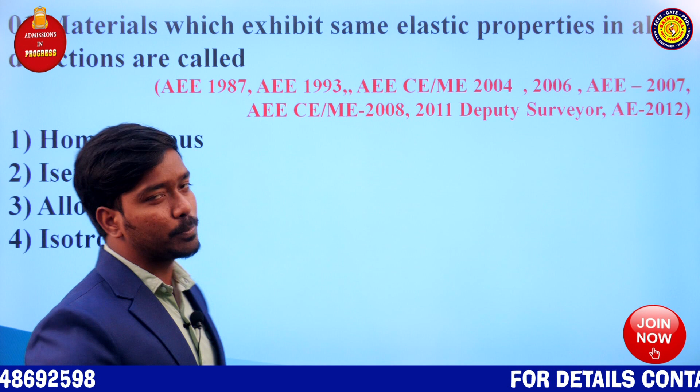The first slide that we can see: question appeared, material which exhibits same elastic properties in all directions. What I want to convey is, observe this, from the starting 1987, then 1993, then it appeared in the year 2004, then 2006, then 2007, then 2008, 2011, 2012. So these many times a single question has been appeared.

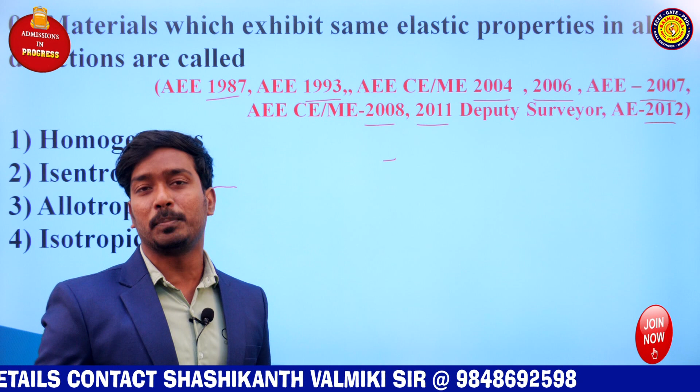In the Assistant Engineer examination, every single question, every single mark is going to get you nearer to your dream job, that is Assistant Engineer Civil job. So definitely, however silly a question may be, if it is repetitive, you should be learning about that question. So we'll be discussing about all those important points now itself.

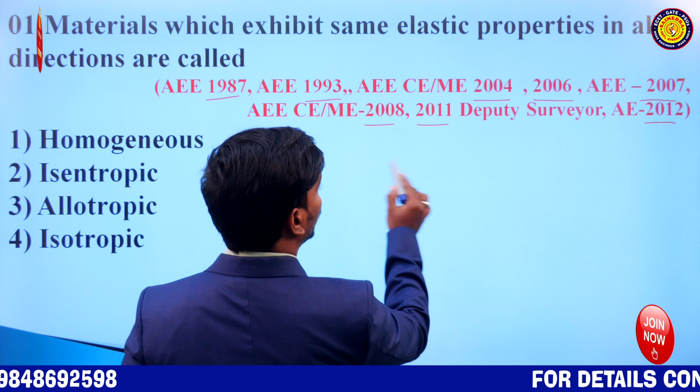So the first thing that we are going to talk about is, what is the meaning of a homogeneous material? Observe here. At any point, property in one direction is going to become same. Same in one direction only.

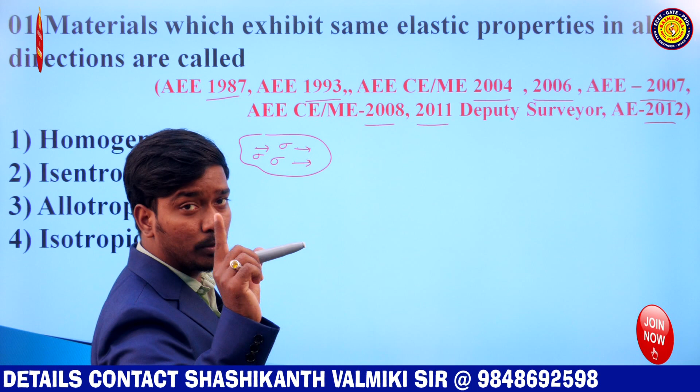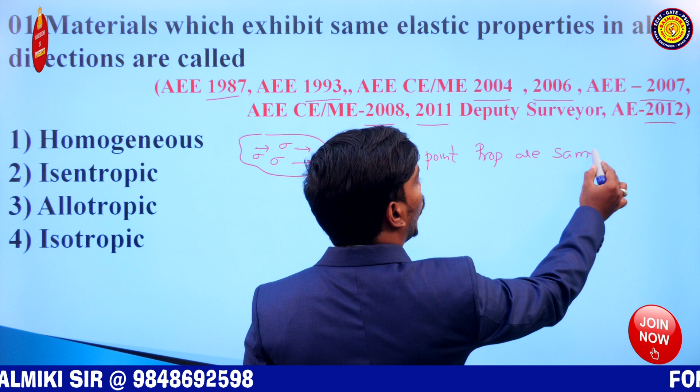Observe, I am taking the x direction. All the properties in one direction are same, at any point. Properties are same. Then it is called as which material? Homogeneous material.

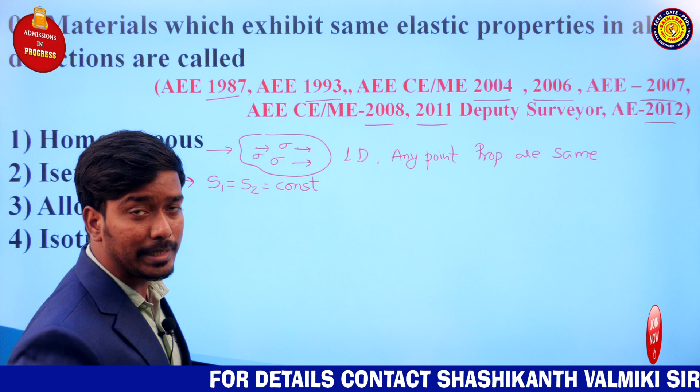Next one is isentropic. Isentropic is related to entropy, which is a degree of disorderness of the materials. Entropy remaining constant, that is energy remaining constant, then it is called as isentropic process. Entropy is represented with the letter S.

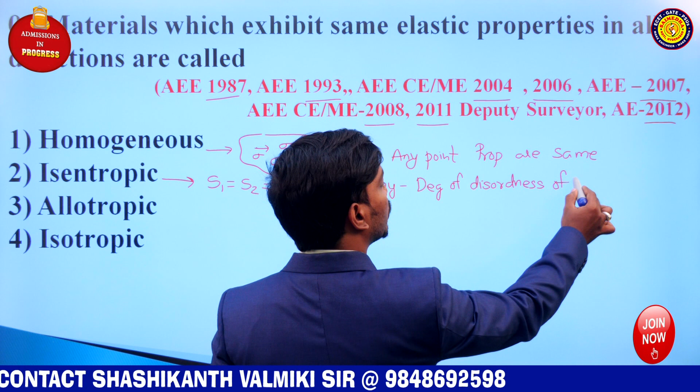Entropy is a degree of disorderness of molecules. This is something related to thermodynamics. If the degree of disorderness of molecules remains constant, then it is called as isentropic property or isentropic material.

Allotropic material. Allotropic materials relate to allotropy. What is the meaning of allotropy? First let's discuss. Allotropy is a conversion of material from one phase to another phase based on the temperature change.

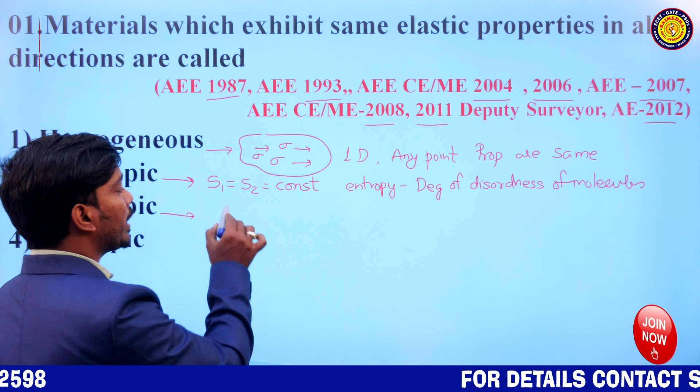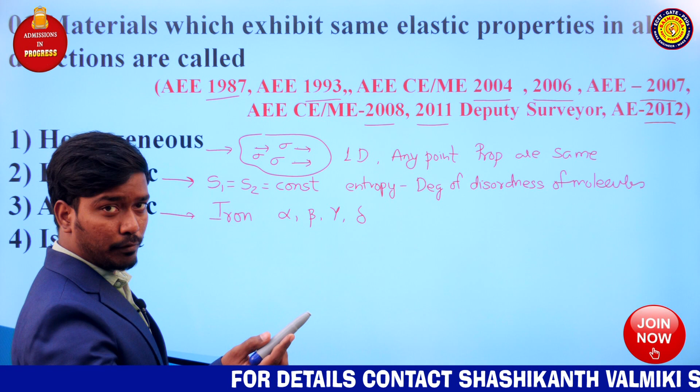That means, suppose iron can exist in the form of alpha iron, beta iron, gamma iron, delta iron. That means it can exist in more than one form based on the temperature. As temperature changes, its structure changes. This structural change is called allotropy change. And the allotropic material is a material which can exist in different forms of crystal structures at different temperatures.

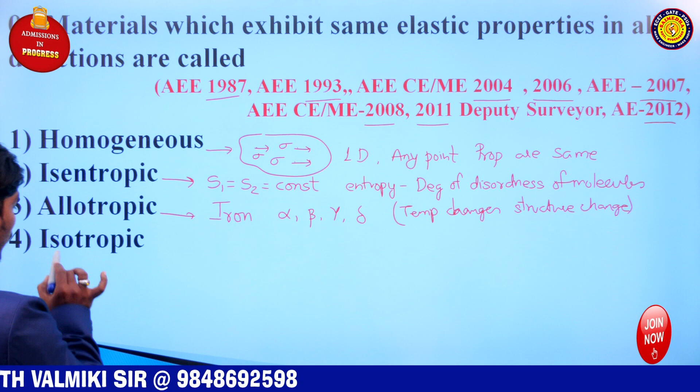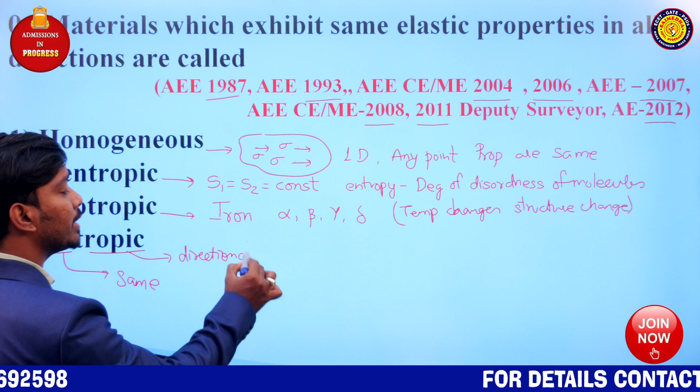So this is also not the correct answer. Now, iso. What is the meaning of iso? Iso means same. Tropic means directionality. So now we can understand that isotropic means at any point, properties in all the directions are same.

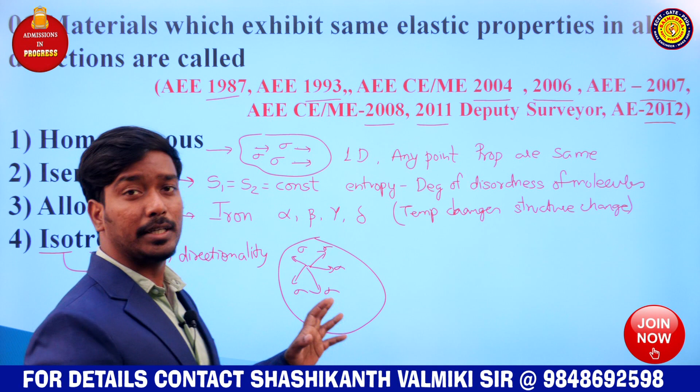Properties in all the directions are same. This type of material is called isotropic material. Now we can understand why this question appeared many times. It is a standard question of strength of materials - the first and foremost assumption is that material is isotropic and homogeneous.

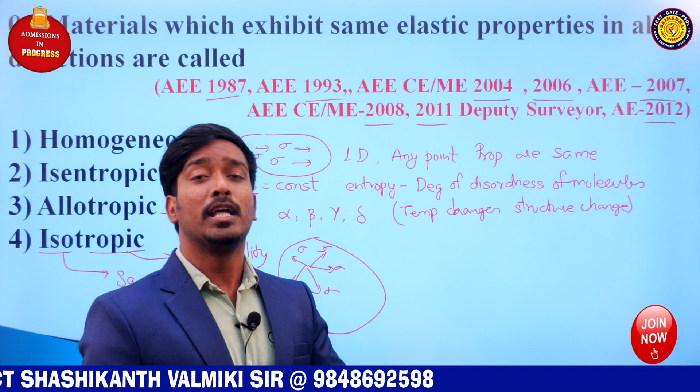So isotropic is what is being asked here. Iso means same, tropic means directionality. In all directions properties are same, then the material is called isotropic material. So what is the correct answer? Option number 4 is going to become the correct answer for this question.

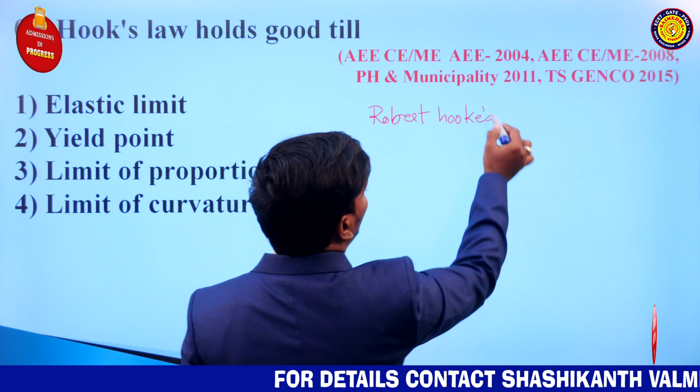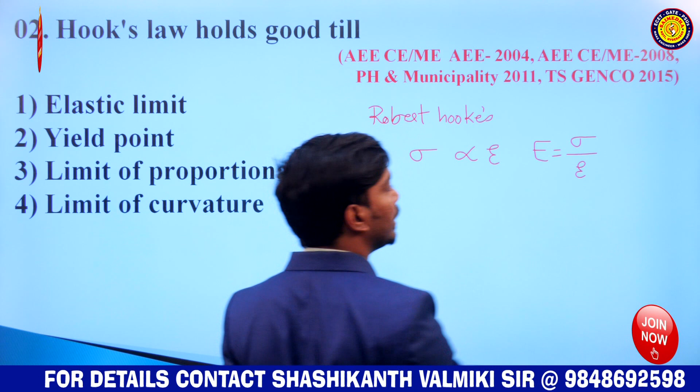Let's see the next question. Hooke's law is valid up to what? Based upon Robert Hooke's law, it states that stress is directly proportional to strain, with which Young's modulus we have derived, that is linear stress divided by linear strain.

Similarly, shear stress directly proportional to shear strain, that is we are going to get the rigidity modulus represented with C, N or G - all represent the same thing - that is shear stress divided by shear strain, that is the angle.

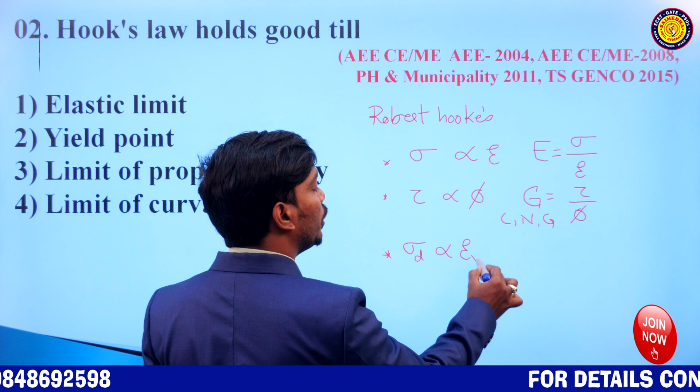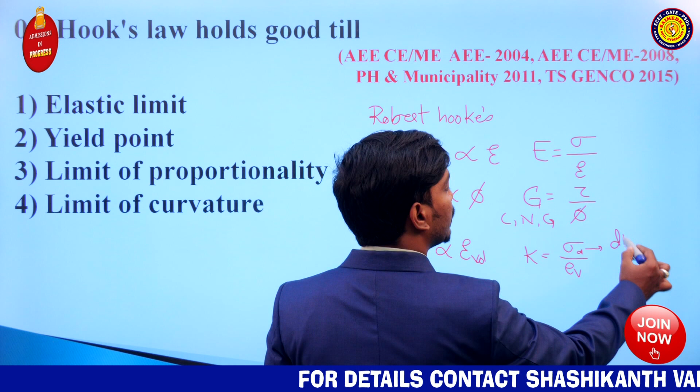Last one is bulk modulus. Based on bulk modulus we can write direct stress is directly proportional to volumetric strain, and it was given by bulk modulus K, that is direct stress divided by volumetric strain. Basically volumetric strain is change in volume divided by original volume with negative sign.

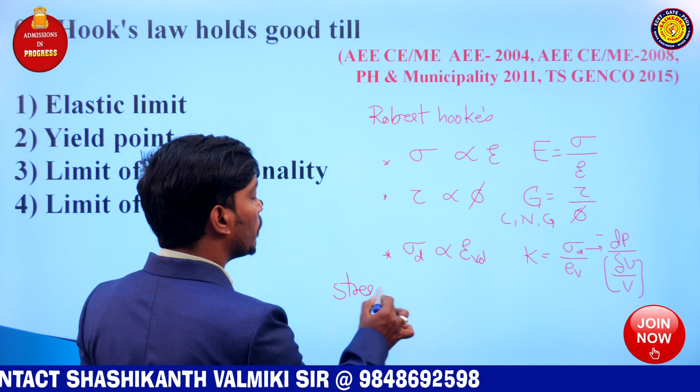So for all of these three - shear stress directly proportional to shear strain, linear stress directly proportional to linear strain, direct stress directly proportional to volumetric strain - this was given by Hooke's law, that is stress is proportional to strain, up to which limit? Proportional to... answer is proportionality limit, or limit of proportionality.

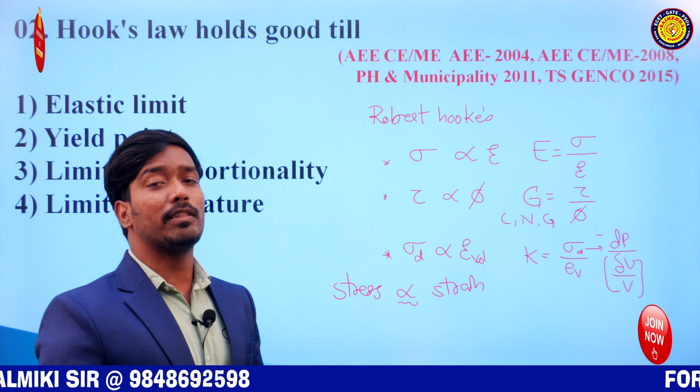Many textbooks give the answer as elastic limit also, but when both elastic limit and limit of proportionality are given as options, you need to choose the correct one. Option 3, that is proportionality limit, is going to become the correct answer.

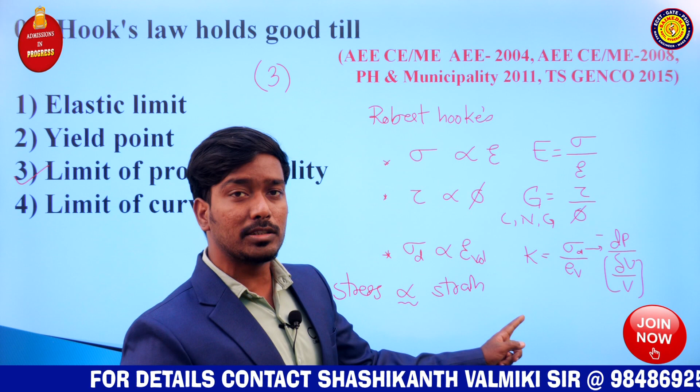So from this question we have learnt that Young's modulus is stress by strain, linear stress by linear strain; rigidity modulus or shear modulus is called shear stress by shear strain; bulk modulus or dilation constant can be written as direct stress by volumetric strain.

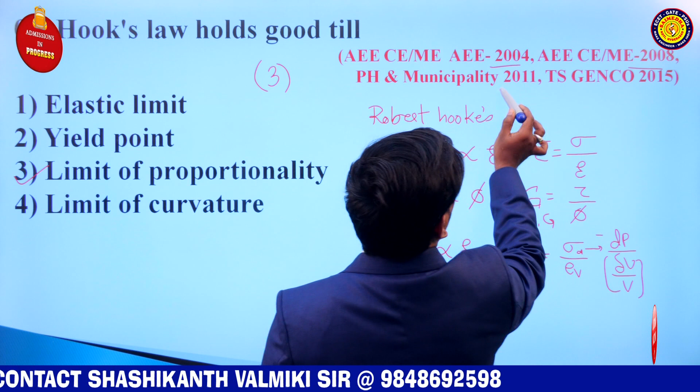So this is again one of the important questions that appeared how many times? Observe here - 2004, 2008, 2011, 2015. Many different competitive examinations created this as an important and most expected question for assistant engineer civil.

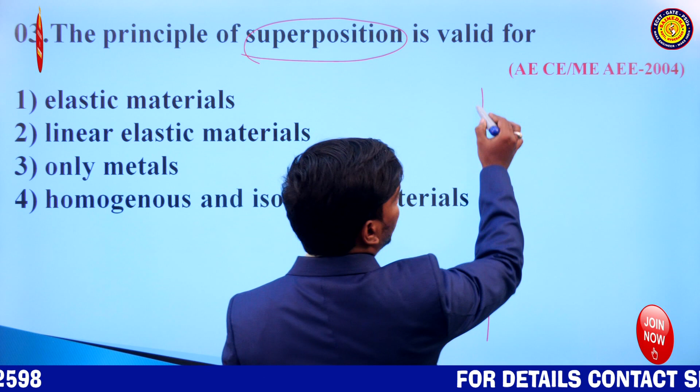Next question, observe - the principle of superposition. This concept is very much important. Sir, what is the meaning of superposition? Superposition principle states that if you are having multiple loads - let's say point load, uniformly distributed load, uniformly varying load.

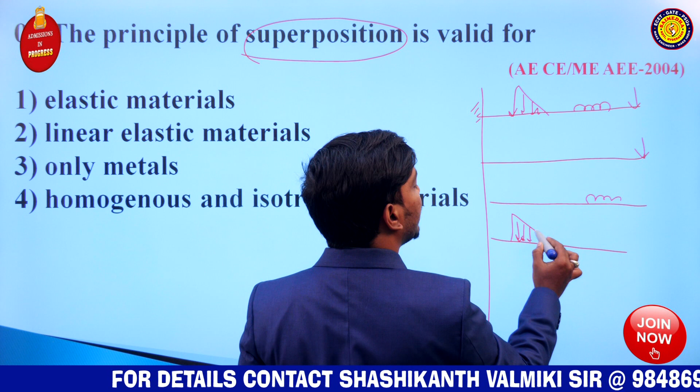So if I take individual loads into consideration - that is point load, UDL, then UVL - and take the algebraic sum of all three, 1 plus 2 plus 3, this is going to give you the same net effect. This was given by the superposition principle. It states that the algebraic sum of all individual loads or partial loads will give the same net effect as the combined load.

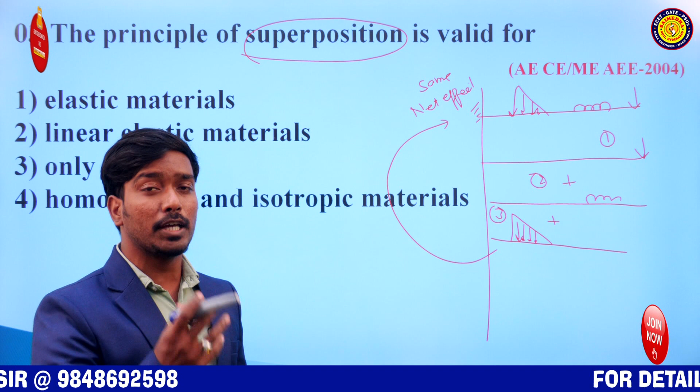So when is the superposition principle valid? Sir, for what materials, what loads, which type of material conditions is it valid? Let's see. Superposition question appeared in the year 2004, and it is valid for linear elastic materials.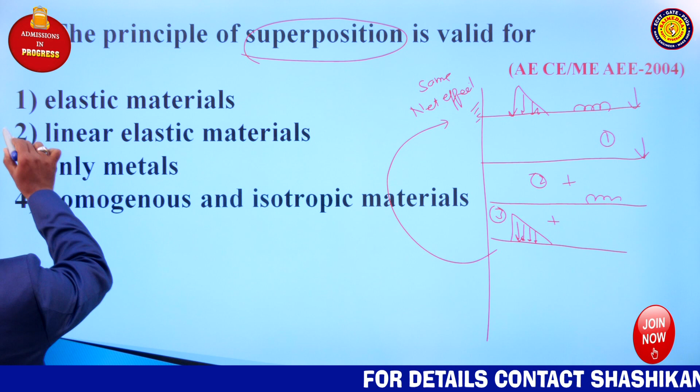Have to remember it is valid for linear elastic materials. That means, observe here, some different variations are there. This variation is called linear elastic - in the tension test you might have learnt about it guys. This is linear elastic, then you will be having the elastic point. This is the proportionality point.

After the proportionality point it becomes non-linear elastic. Then you will be having the yield point - upper yield point is there, then lower yield point is there. Then we will be having a plastic point, afterwards the ultimate point, and after the ultimate point we will be having failure of the material.

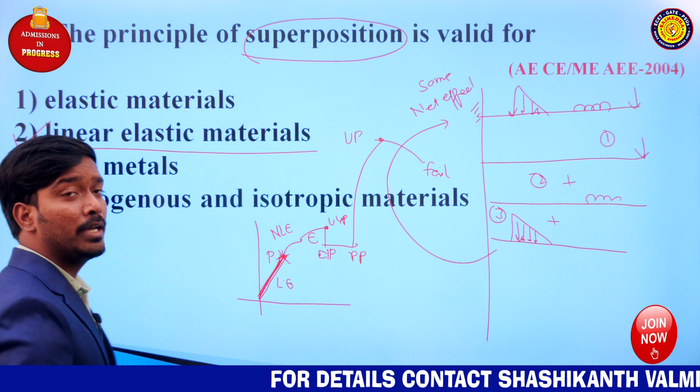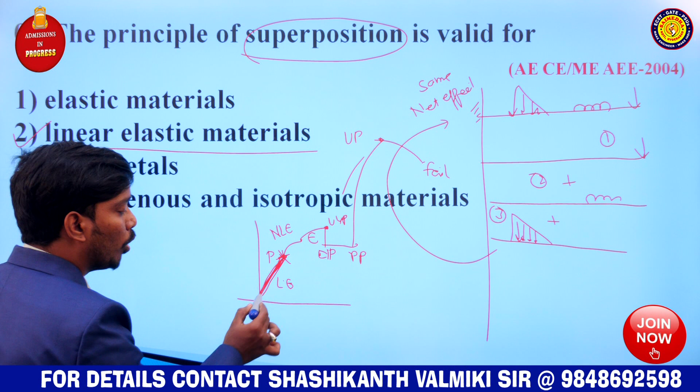So this starting variation is called linear elastic, that means up to proportionality limit only it is going to be varying. After that, non-linear elastic - this is called yielding, this is plastic zone, this is strain hardening, this is strain softening. The point we need to remember is that superposition is valid only up to the linear elastic materials. So second one is the correct answer.

Let's see one more superposition question here. Observe, one more superposition question appeared in the year 2006. Sir, the principle of superposition is applicable under what condition? Very small deformation must be there - that means slopes and deflections are negligible. This is again one of the assumptions of strength of materials.

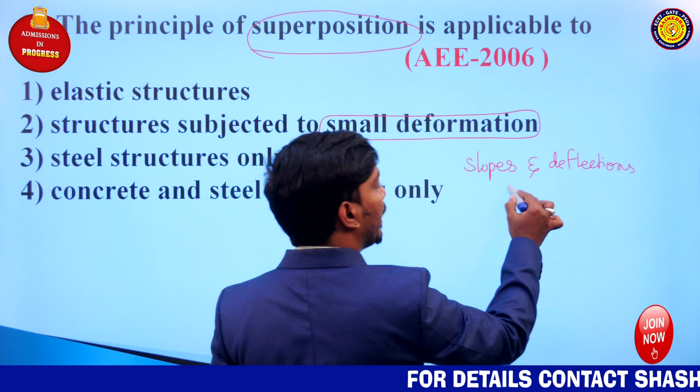Have to remember, slopes and deflections are small. This is what we need to remember - or that slopes and deflections are very small in comparison with the radius of curvature, that is bending.

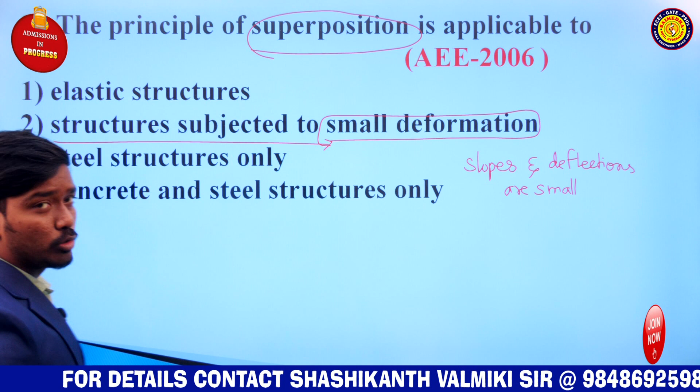For structures subjected to very small deformation, the superposition principle is valid. This is an important question that has appeared before. The principle of superposition is always valid for gradual loads, but it is not valid for impact loads. This was asked in a 2008 exam.

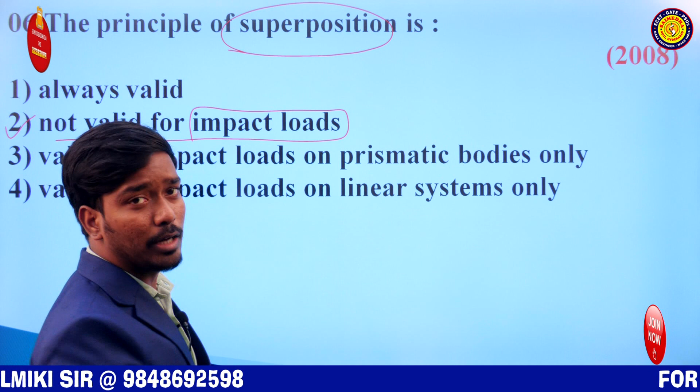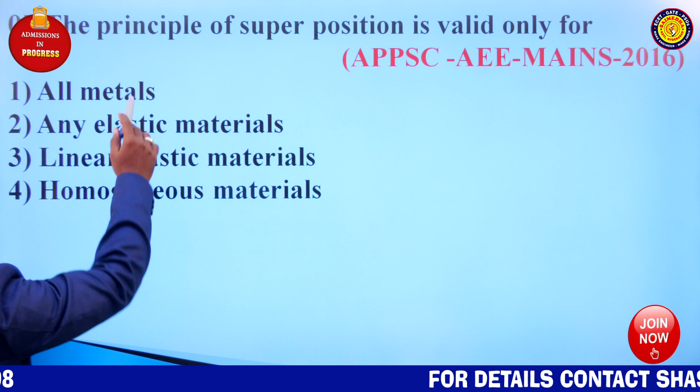One more important superposition question - you can see how many times this concept gets repeated. The principle of superposition is valid only for linear elastic, homogeneous materials. The answer is linear elastic materials. This appeared again in the APPSC AEE Mains 2016 exam.

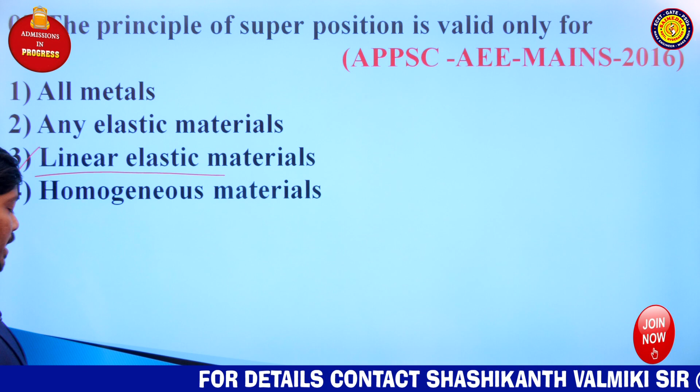The factor of safety is given by - let's first understand factor of safety. I'll write here: factor of safety equals deformation stress. This is a logical formula I have created, and I have to remember it in this manner: deformation stress divided by design stress or working stress.

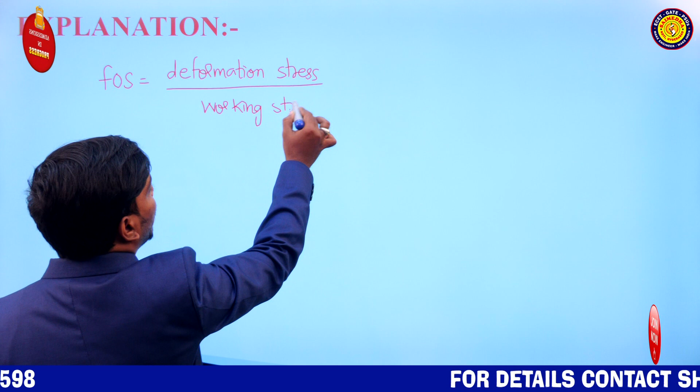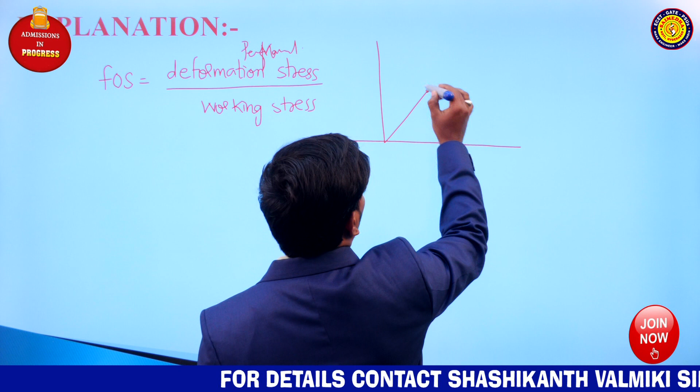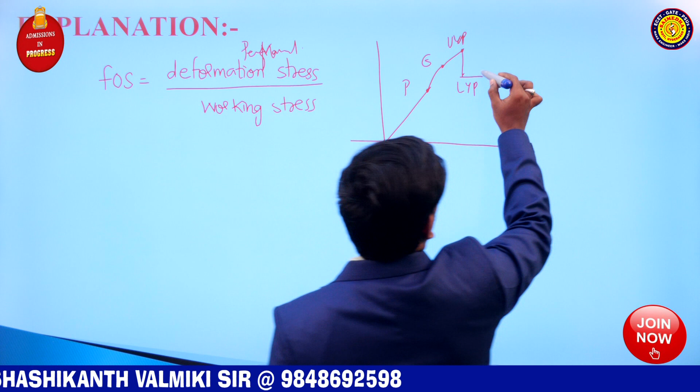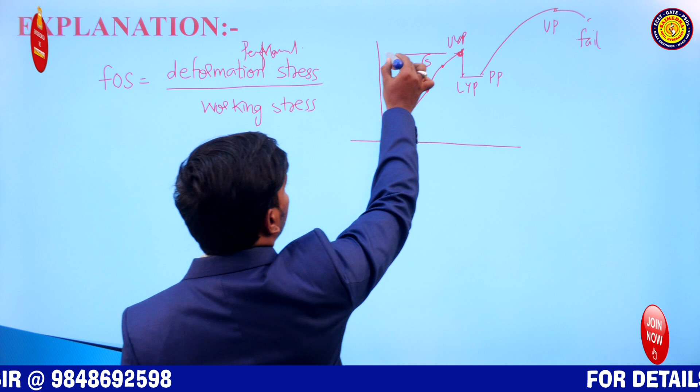Where does the permanent deformation start? If you see a ductile material subjected to a tension test, you will find first the proportionality limit, then the elastic limit, then the yield point - upper yield point and lower yield point - then the plastic point, then the ultimate point, and then the failure. Remember that the yield point is the point, the yield stress is the stress, where the permanent deformation starts.

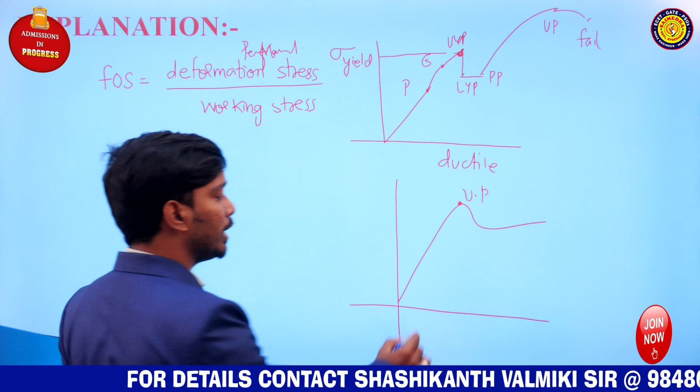This diagram is for ductile material. If you see a brittle material, it fails directly from the ultimate point - there is no yield point here. So deformation starts from the ultimate point itself.

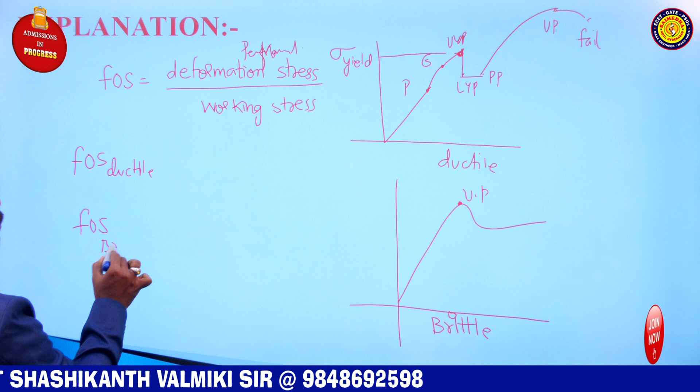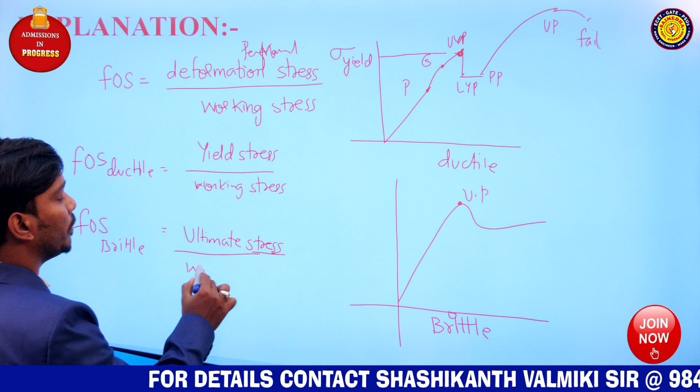So we will have two formulas for factor of safety - one for ductile material, another for brittle material. For ductile material, the deformation stress is the yield stress. For brittle material, the deformation starts at the ultimate point, so we use ultimate stress. This is the logic to remember the factor of safety for both ductile and brittle materials. At the denominator, we always have working stress or design stress - no change there. Focus only on the numerator: ductile material uses yield stress, brittle material uses ultimate stress. This is the formula we need to remember.

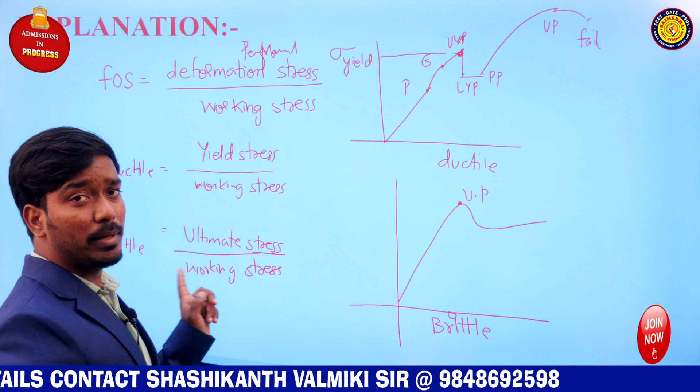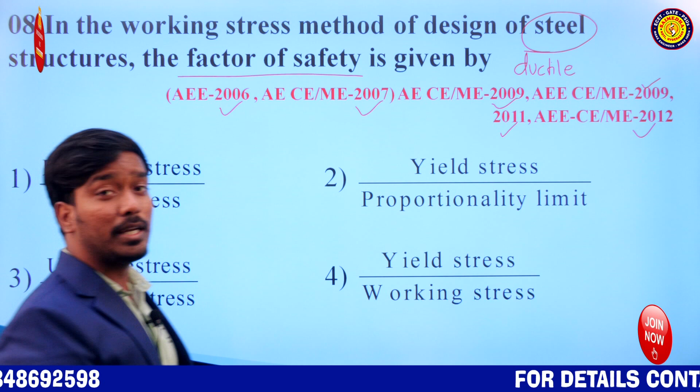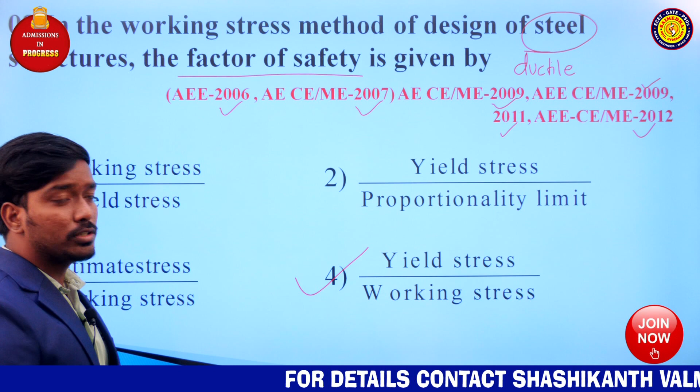Now let's come back to what formula is being asked - for steel, that is ductile material, factor of safety for ductile material. This question has appeared many times: 2006, 2007, 2009, 2009, 2011, 2012 - in assistant engineer and various competitive examinations. The correct answer is yield stress divided by working stress, since deformation stress for ductile material is yield stress.

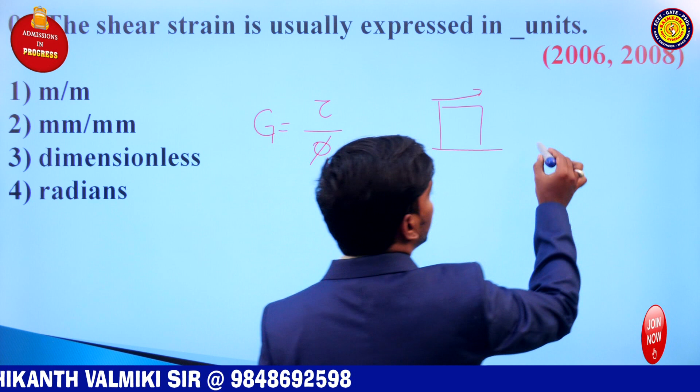Let's move on: shear strain is usually expressed in - observe the shear strain. It comes from the shear modulus G, which equals shear stress divided by shear strain. This shear strain is basically an angle. When a body is subjected to tangential forces, it shifts its position by creating an angle.

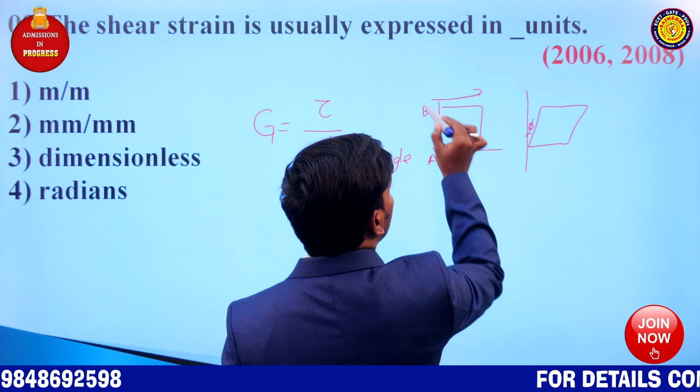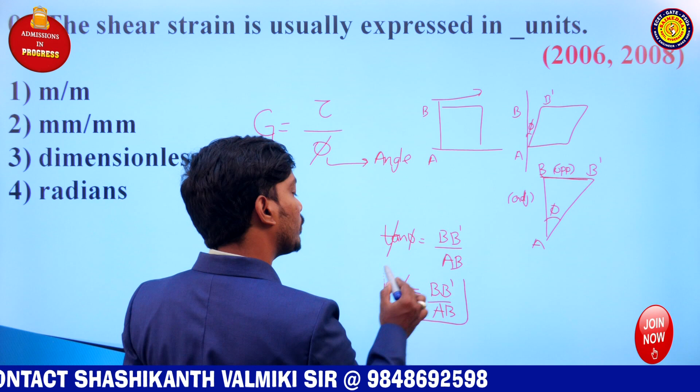Let's say point A and point B - point B will shift to B dash. If I draw a triangle creating this angular deformation, with A as one vertex, the slope or angular deformation is tan phi, equals opposite by adjacent. The opposite is BB dash, the adjacent is AB, so tan phi equals BB dash divided by AB. Since phi is very small, we can write phi equals BB dash divided by AB. This phi is an angle, so we represent it accordingly.

Radians. So which is going to become the correct answer now? Radians is going to become the correct answer. So for this question we can write shear strain, option number 4 is the correct answer. No units is not there in the option.

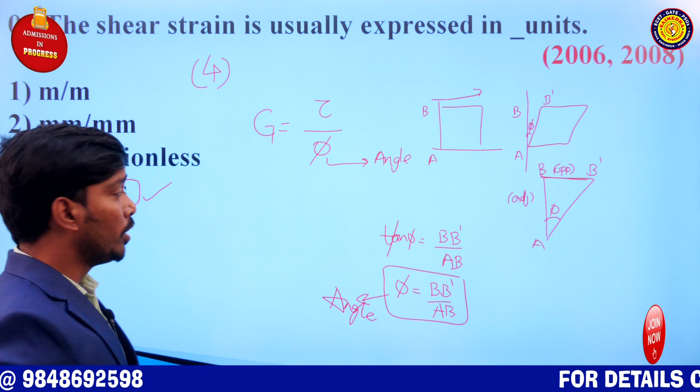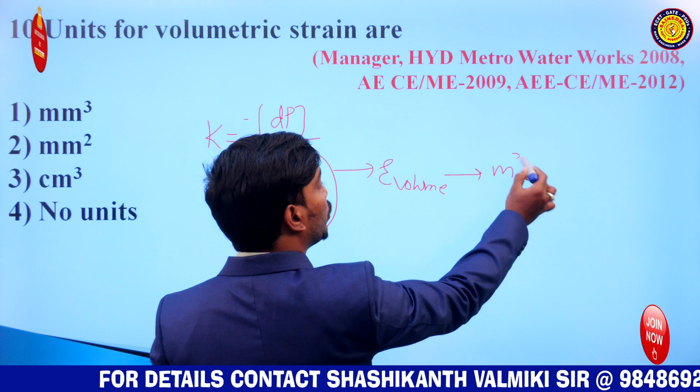Next one. Units for volumetric strain are: volumetric strain formula is there in bulk modulus. Bulk modulus is equal to direct stress, that is pressure, divided by change in volume divided by original volume. So this is the volumetric strain. Volumetric strain will be equal to change in volume by original volume, that is meter cube divided by meter cube. Meter cube cancels. So what are the units for volumetric strain? Volumetric strain does not have any units.

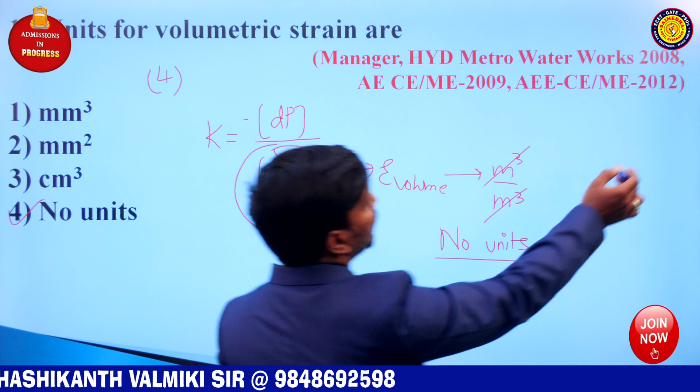So what is the correct answer? No units is going to become the correct answer for the question. How many times has this question appeared? Observe here, 2008, 2009, 2012. 3 times this question has consecutively appeared in the competitive examination.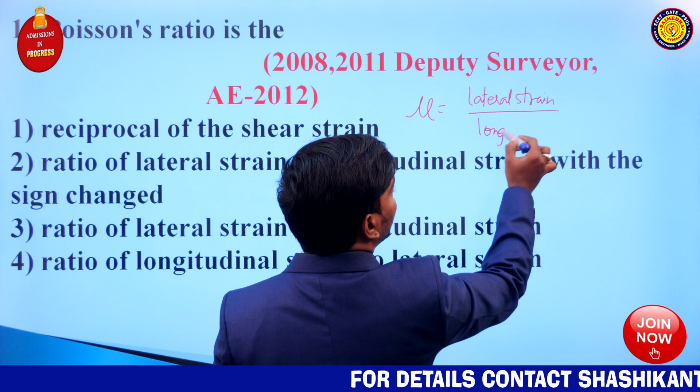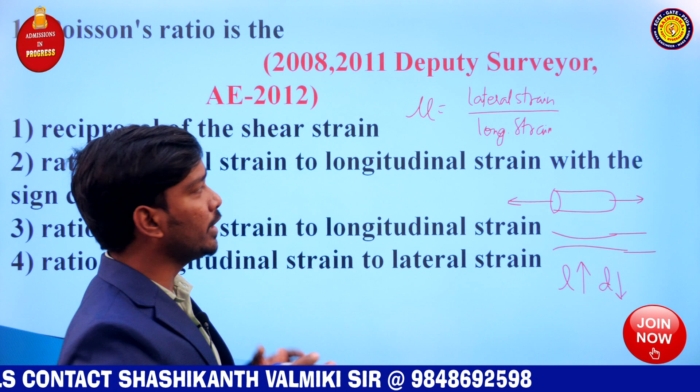Next question. Poisson's ratio is equal to, what is the formula? Lateral strain divided by longitudinal strain. Suppose this is a member to which we are applying the load. What happens, guys? Diameter is going to decrease, but length is going to increase. That means if one dimension is going to reduce, another one is going to increase. So one is positive, another one is going to become negative.

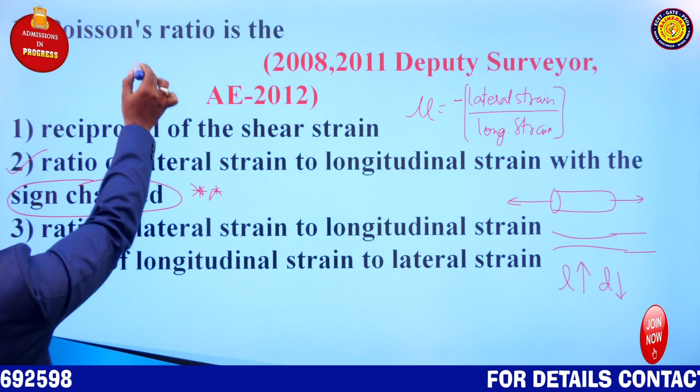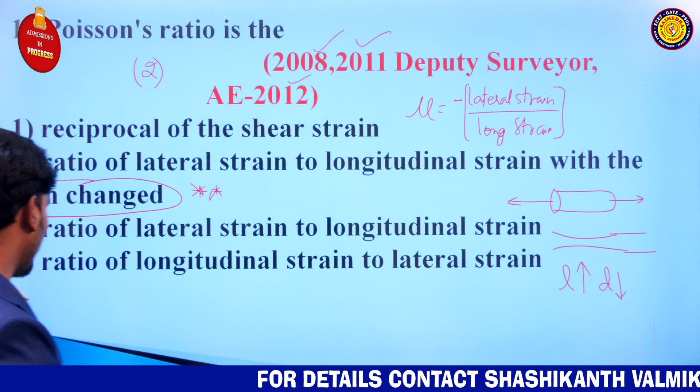So this is the basic formula; with negative sign also you need to remember, because 2 options are there. Ratio of lateral strain to longitudinal strain with sign changed. So what is the correct answer for this question? Option 2. How many times did this question appear? 2008, 2012, 2011, 2012 assistant engineer examination. So now we can understand how important these questions are, the most expected questions for next year's assistant engineer examination.

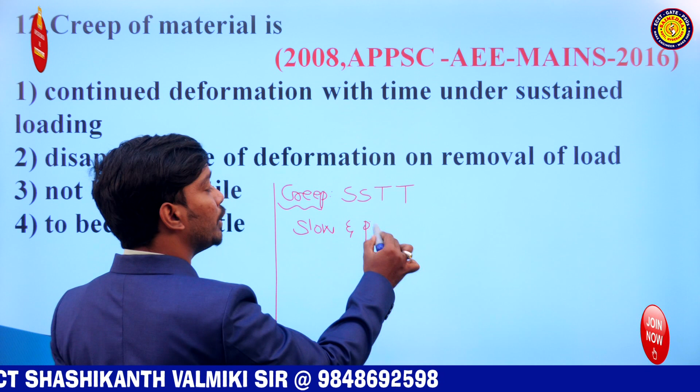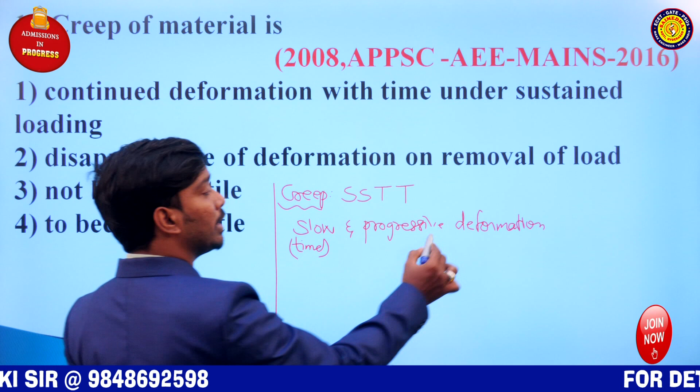Next one, creep of the material. Creep depends upon 4 parameters: stress, strain, time, temperature. What is the definition of creep? Slow and progressive deformation. Deformation means strain. Slow means time. Under constant stress; the keyword is constant stress. Generally it takes place at a high temperature, which is going to increase the creep. So 4 parameters are there that we need to remember for creep: time, temperature, stress and strain.

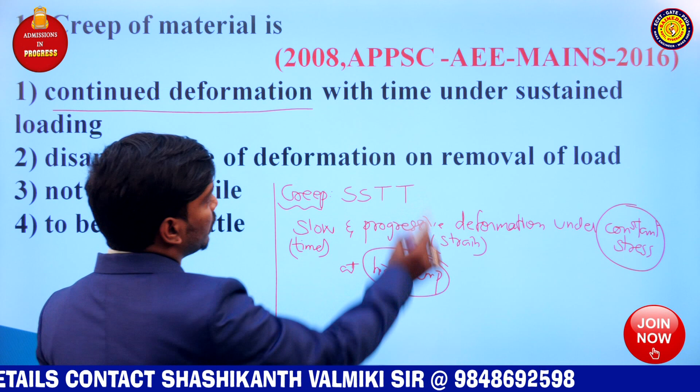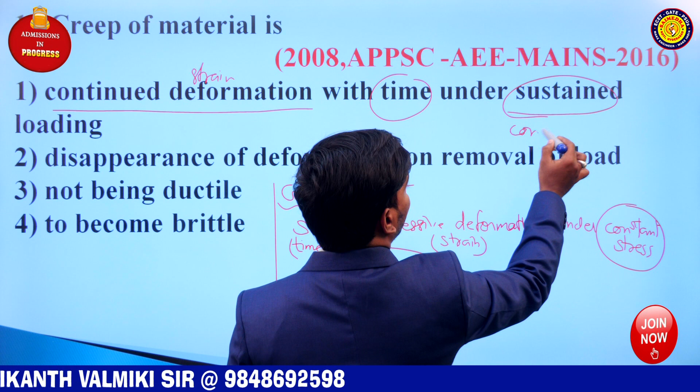Now let's understand the definition. Continuous deformation with time. This continuous deformation is related to strain, and this is related to time. Under sustained loading. This sustained loading is what? Constant stress. So which one is the correct answer? Option 1 itself is going to become the correct answer. Okay. Observe the next question now.

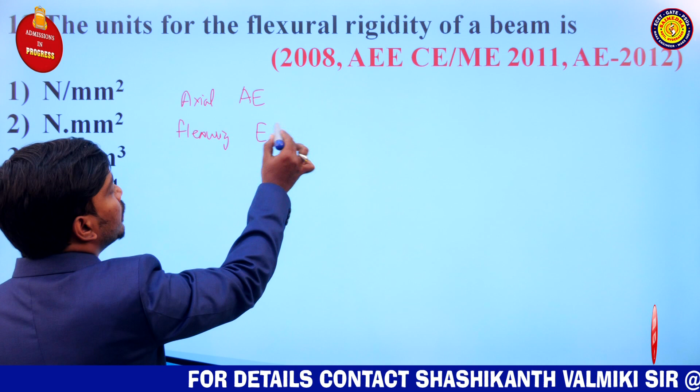Flexural rigidity. How many rigidities are there? Actually 3 rigidities. The first is axial rigidity, AE. The next is flexural rigidity, EI. Then torsional rigidity, equal to GJ. What are the units for axial rigidity? Meter square into Newton per meter square; both get cancelled, so the units are Newton.

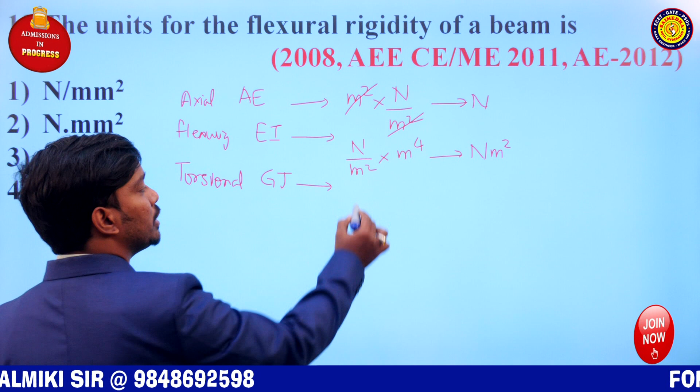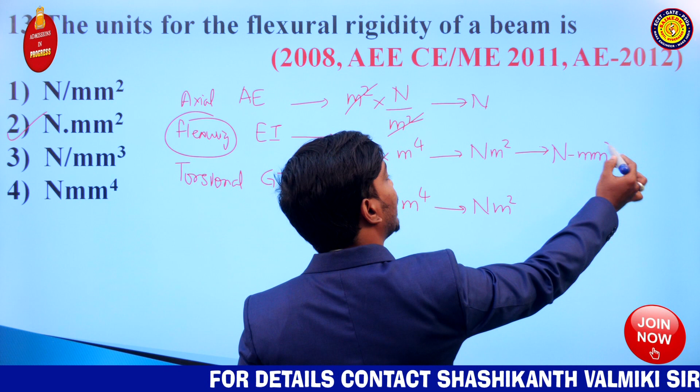EI is Newton per meter square into meter power 4, so the answer is Newton meter square. G is the shear modulus, Newton per meter square, and J is the polar moment of inertia. So the units are Newton meter square. The question asked about flexural rigidity: Newton mm square or Newton meter square. In mm it becomes mm, so Newton mm square is the correct answer. This is how you learn the surrounding questions also. This is the end of the slide.

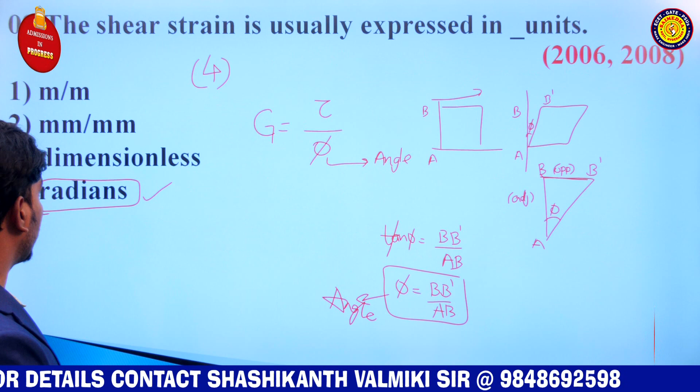So make sure you are understanding all these questions, guys.